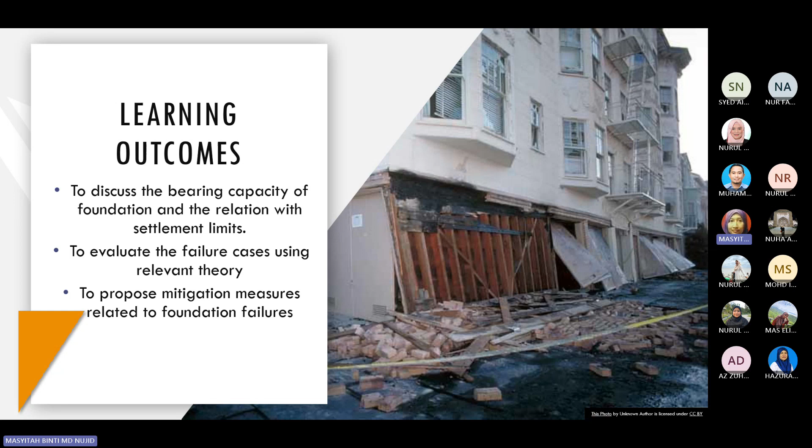For example, just giving you some idea kalau kata foundation ada berapa jenis, kemudian foundation tu apa fungsi dia dari segi design dan konsep, and then the bearing capacity, ultimate bearing capacity, the allowable bearing capacity, and settlement. Finally baru kita pergi kepada case study. So the case study will be in Canada, which happened back in 1940s if I'm not mistaken. Yang tu pun saya akan cover kemudian lah.

Okay, the next one is the concept itself. Sebelum kita tahu macam mana bearing capacity failure tu boleh berlaku, we have to understand the structure itself. So dalam geomechanics ni, bila talking about infrastructure failure, when we design a structure, foundations will be at the lower part of the structure. So foundation ni berfungsi untuk carry the load from superstructure and transmit to the soil beneath the structure. So if the soil is not strong enough, you may have the consequences where the structure will fail.

So we want to ensure that the soil will provide you a good ataupun strong bearing capacity. So by definition, the foundation failure occurs when the applied load on the foundation exceeds the soil capacity to support the load. Maknanya, your punya tanah tu dah tak boleh nak tanggung beban daripada atas, so dia akan fail. The failure ni kita boleh define from the shear strength versus shear stress.

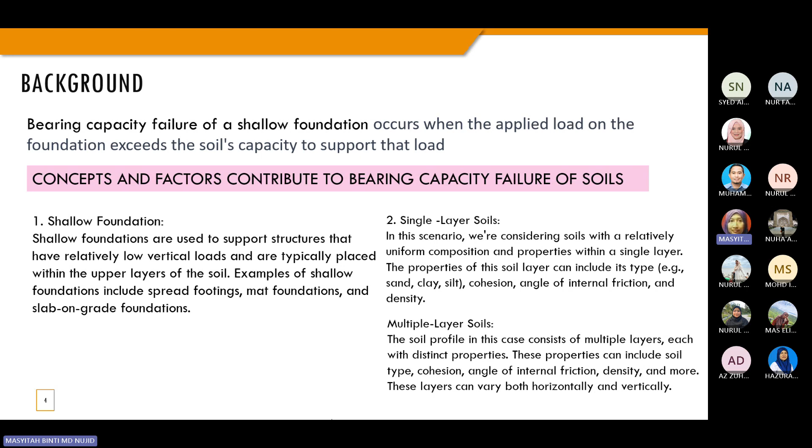The next one is bearing capacity. By definition, it is the ability of the soil to support a load without causing excessive settlement or failure of the foundation. It is usually expressed as pressure or force per unit area, denoted as q. The ultimate bearing capacity is the maximum pressure the soil can withstand without failing. So here we have two q's: one is the ultimate bearing capacity, qu, and the other is the contact pressure, q, which will be explained later.

Factors controlling bearing capacity include soil type, depth of foundation, foundation size and shape, water table, and lastly the overburden pressure. What is overburden pressure? In soil mechanics we mostly consider it as the unit weight of the soil multiplied by depth. For example, with a single layer soil, this is the ground surface, and you look at a stress point 5 meters below the ground surface, so H equals 5 meters.

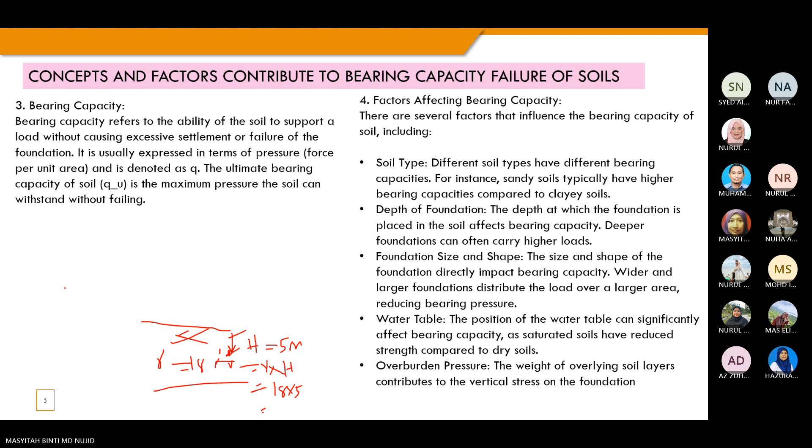So kalau you analyze for single layer, kita boleh ambil simple assumption menggunakan Terzaghi bearing capacity equation. But actually the formula ataupun the equation must be recheck sama ada kita nak analyze bearing capacity untuk clay ataupun untuk sand. So different soil properties will give you different formula ataupun teori calculation untuk dapatkan ultimate bearing capacity. Yang ni yang biasa dia guna untuk conventional calculation.

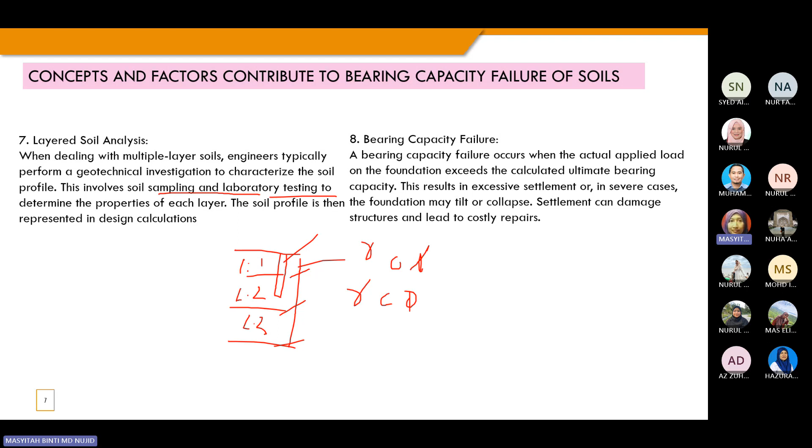So it says that kalau your foundations are laid on the layered soil, so it's better to have data ataupun lab results lah untuk carry out the calculations. So how to carry out the calculations or what are parameters relevant to the calculation? For example here is the gamma, C dan juga phi. So itu yang lebih penting lah. So soil properties daripada lab boleh bagi awak data ataupun input to calculate the bearing capacity. Okay, the next one is on

Okay, ini lebih kepada briefly idea how to differentiate the purpose or how to choose foundations. So as I said again, in order to choose the right foundation type, firstly kita akan tengoklah dia punya function dia, kemudian loading you berapa, and then the hard layer stratum you pada berapa kedalaman. Kemudian kalau you ada borelog report from the SI, so kita dah through the reading tu kita nampak okay hard stratum a bit low kan ataupun dia quite far, so kita dah tak boleh pakai shallow foundation, kita kena pakai deep foundations.

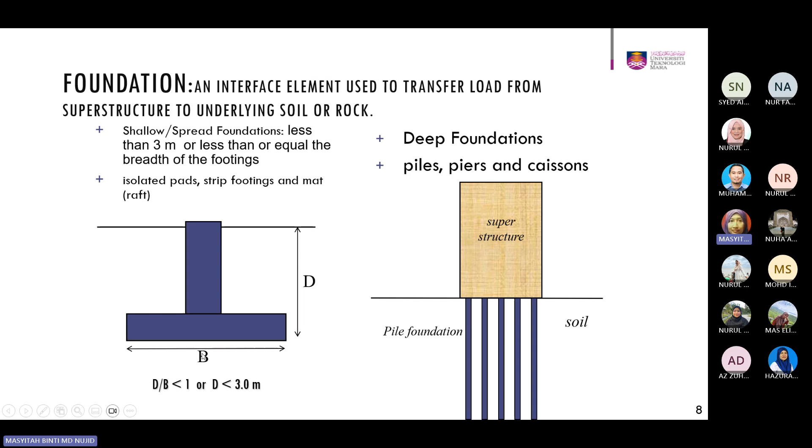So the simple condition is, if the depth over B ratio is less than 1, or depth less than 3, then we use shallow foundation. But if it doesn't meet these two conditions, automatically we can use deep foundation. But now we want to focus here on the shallow foundations part.

These are the factors need to be considered while you design shallow foundation: adequate depth, limiting settlement, and also the factor of safety. Adequate depth means the sufficient depth to prevent any adverse effect due to changes in surface condition, climatic changes, temperature changes, or any kind of horizontal loads or overturning moments. Next is the limiting settlement, for example total settlement, differential settlement, and the angular distortion need to be tolerated in the design. It also depends on the functional performance of the building and the requirement of the users, as well as economic factors.

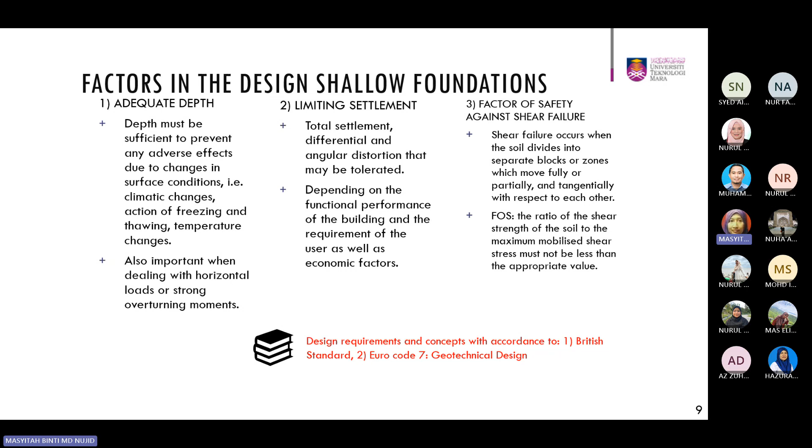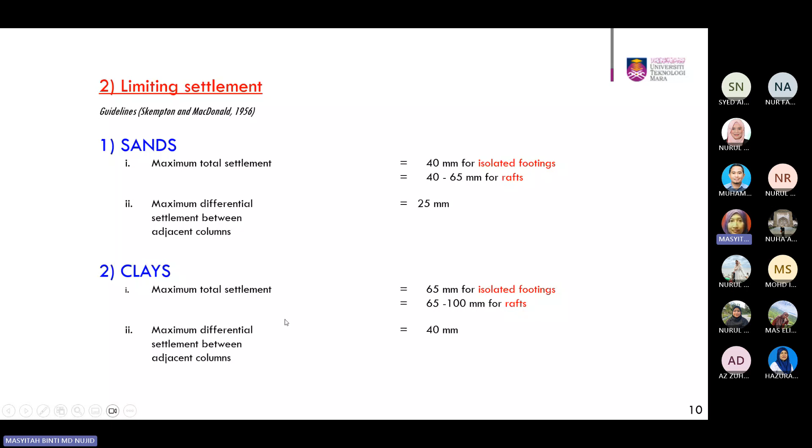Next is on the modes of shear failure - general shear failure, local shear failure, and also punching shear failure. If I'm not mistaken, during undergraduate study for structure, usually we design for punching shear failure. But in some cases, it might only be general shear failure, not going as far as punching shear failure. So that is the worst failure that can occur on foundations.

Okay, for general shear failure, you can see the deformations when you apply the loads - the slip surface develops outward towards one or both sides and eventually to the ground surface. The failure is sudden, with severe tilting leading to final collapse. It is mostly associated with dense sand or over-consolidated soils of low compressibility.

For the local shear failure, the shear plane starts from one side and ends within the soil. So adjacent bulging may occur but with little tilting. And the settlement which occurs will usually be the principal design criteria. This type of failure normally occurs in loose cohesionless soil.

And this is the punching shear failure, mostly occurring in very loose cohesionless soil. So what is loose cohesionless and very loose cohesionless - it refers to the size of the sand itself or the sand density.

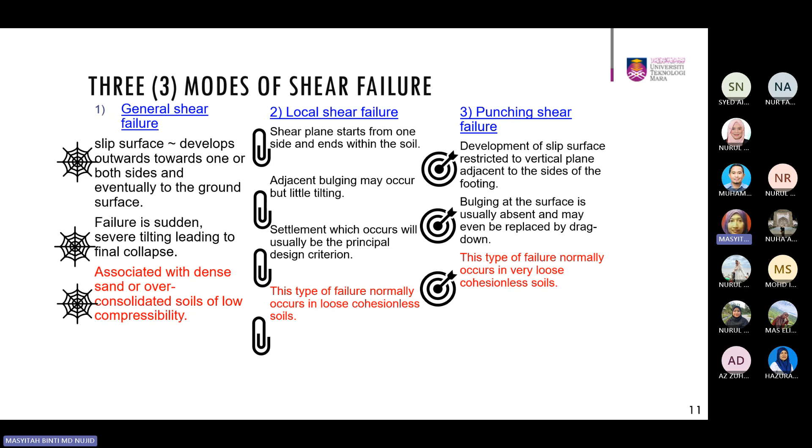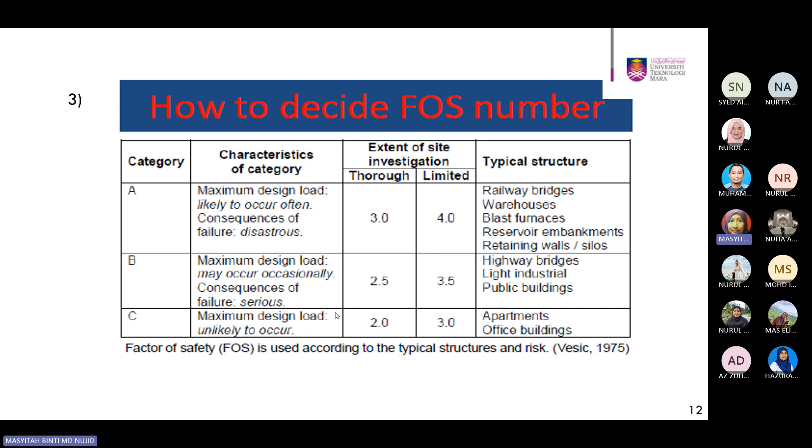Okay, these are some recommendations if we want to design, what value of FOS is allowed. If you have some kind of structure or characteristic like this, or the applications, you can have 3 for example, or 4. I'm not sure, but mostly if we do analysis, we just take it as 3.

The essential points from this brief, general overview about the foundations - mostly we can say the dense soil fails along well-defined slip planes resulting in a general shear failure.

Loose soils do not fail suddenly and the slip planes are not well-defined, resulting in local shear failure. Very loose soil can fail by punching shear failure, and more settlement is expected in loose soils than in dense soils, because dense soil is more compact, so the expected settlement is less.

If soil can be categorized into groups according to size of material, settlement is similar too. Usually for coarse grain soil, the settlement we measure we call immediate settlement. If you have fine grain soil, settlement can occur as primary or secondary settlement.

So the expected failure surface for general shear failure consists of a rigid wedge of soil trapped beneath the footing, bordering radial shear zones under Rankine active and passive zones. Rankine is the theory used to develop the shear failure plane.

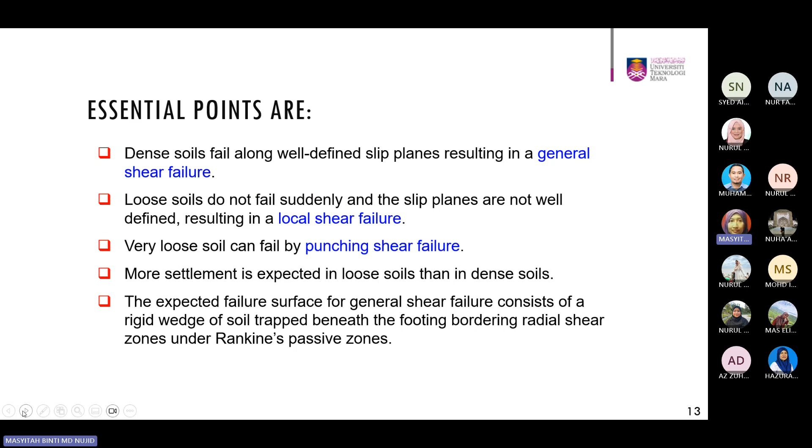Okay, these are some definitions for foundation, for example ultimate bearing capacity, which I mentioned earlier. Some calculations need the net bearing pressure. So it depends - net ultimate bearing capacity is the ultimate bearing capacity minus the overburden pressure.

Factor of safety, don't forget that when you deal with foundations. And we also have the presumed bearing value, which is for preliminary design purposes.

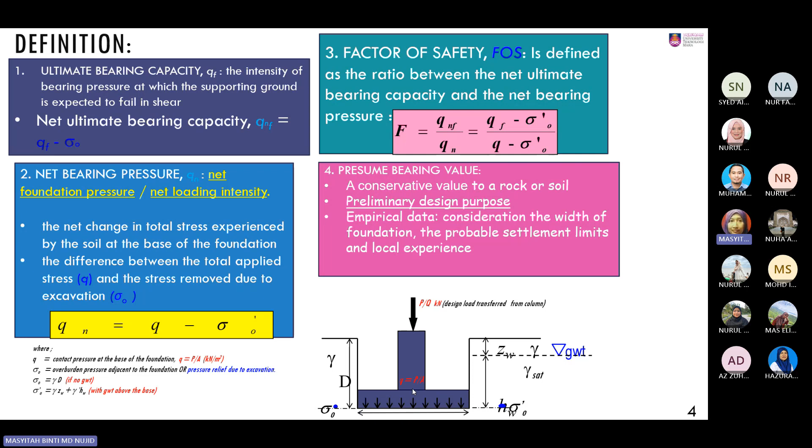Okay, this is an example of how you get the overburden pressure, and how this overburden pressure is affected by the water table effect, part of the unit weight itself, and D is the penetration or excavation depth to place the footing on the soil.

Okay, these are the assumptions made by Terzaghi, as I mentioned earlier about Terzaghi. Actually Terzaghi is a very conventional theory or formula in foundations. Whenever you open a geotechnical engineering textbook, Terzaghi is the first thing - he is known as the father of soil mechanics, so they are very famous.

Besides Terzaghi, we have Meyerhof, we also have Hansen. Why do people like to use Terzaghi's theory rather than others? Because the assumptions made by him are very easy.

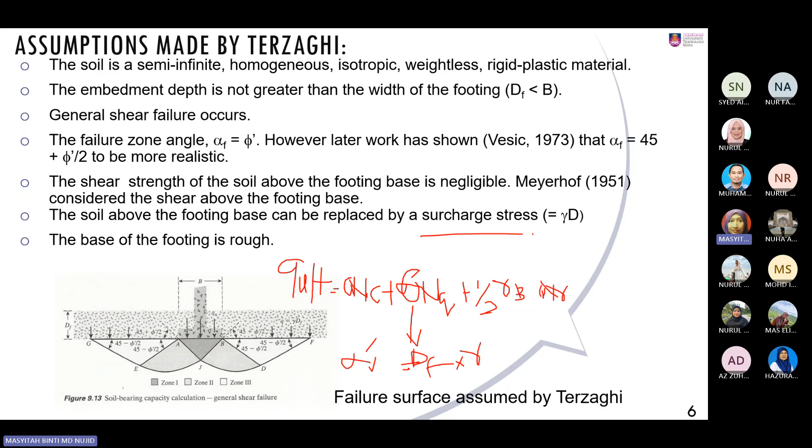And the next assumption is that the base of footing is rough. If you have a textbook, some textbooks also consider the case where the foundation is smooth, so the formula changes and is different.

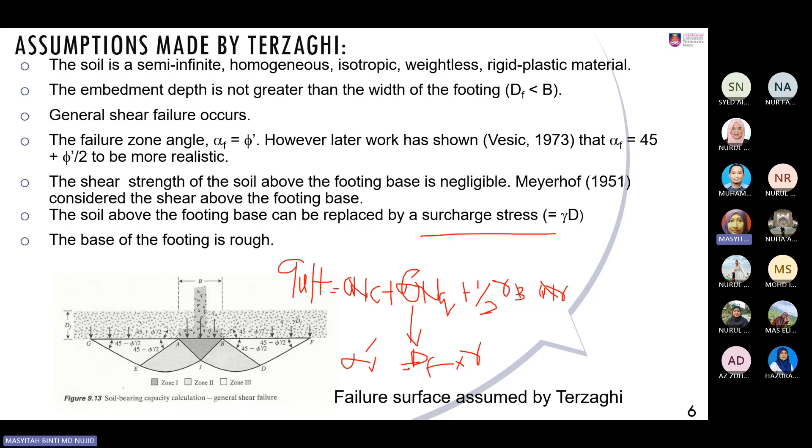Okay, we want to touch a little on the definitions of settlement. Why do I touch on settlement? Because earlier when we looked at the calculation for factor of safety, you have two types - either you calculate the ultimate state based on shear strength, or you calculate the serviceability limit state based on settlement. If you calculate for shear strength, the allowable bearing capacity can be taken with simple calculations without considering the settlement effect. But if you want to consider the settlement effect, the formula for primary settlement is different, and immediate settlement also has a different formula. So what is settlement?

Settlement is the vertical downward displacement at the base of foundation or other structure due to ground movement. What is total settlement? Total settlement is the summation of immediate settlement plus primary consolidation settlement plus secondary settlement. Immediate settlement is usually for coarse grain soil, primary consolidation is usually for soft soil or clay, and secondary settlement involves organic material.

What are the causes of settlement? The cause of settlement is the reduction of volume, the air void ratio in the soil. So settlement is resulted from consolidation. If you remember when we studied soil mechanics, you would hear about compaction and consolidation. Compaction and consolidation are different things.

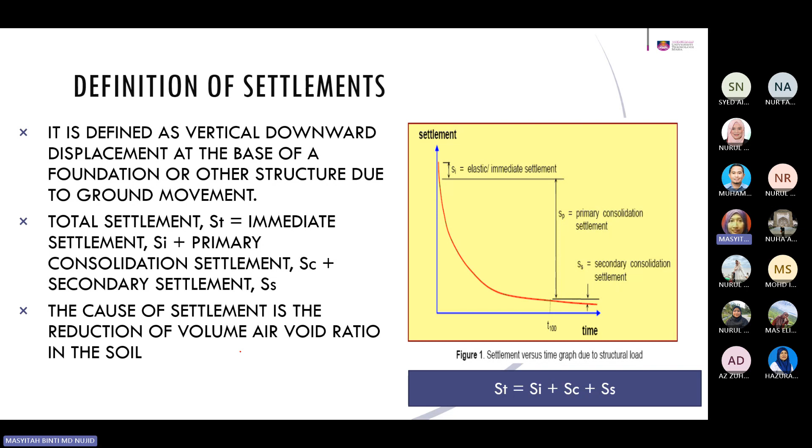So when we plot the graph, this is the graph that you may get from the oedometer test. The graph depends on whether you plot it using the Taylor method or the Casagrande method. Initially is the immediate settlement. Then the middle section, from 0 to 100%, is the primary consolidation settlement. After that is the secondary consolidation settlement. Usually, secondary consolidation settlement takes time to really stabilize or reach its final stage.

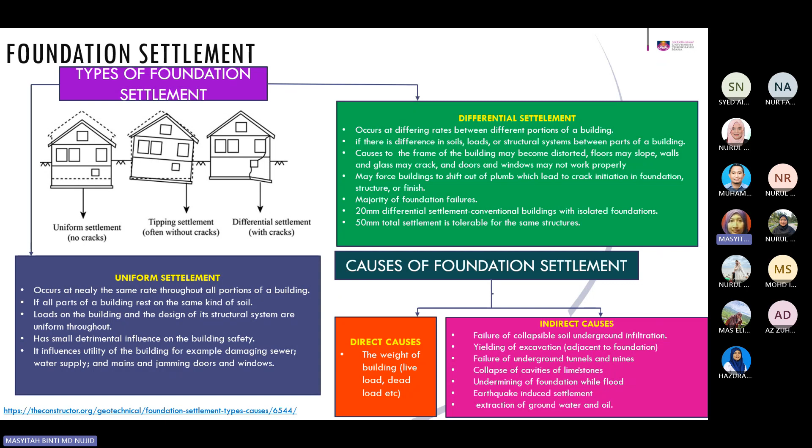Okay, these are the types of foundation settlement. Then the causes - if you have uniform settlement, what is an example? If you have differential settlement, what are the significant signs you can see obviously, and what are the factors? For example, due to direct causes, it may be due to the weight of the building, live load or dead load. For indirect causes, for example, earthquake, failure of collapsible soil, underground infiltrations, and then failure of underground tunnels and mines. So these are the indirect causes of settlement.

Okay, these are some explanations for immediate settlement, primary settlement, and secondary settlement. I hope that after this explanation, you can already answer the learning activity for week 6, if I'm not mistaken.

So kalau kita tengok immediate settlement, sometimes it also can call as a short-term settlement. It can place in coarse grain soils at high permeability and in unsaturated fine grain soil of low permeability. Occurs over a short period of time, which about 7 days, for example. So it ends during construction time.

For primary settlement, it also called as a primary consolidation. It takes around 1 to 5 years, for example. And then the primary settlement frequently occurs in saturated inorganic fine grain soil and expulsions of water from pores of saturated fine grain soils in the course of primary settlement.

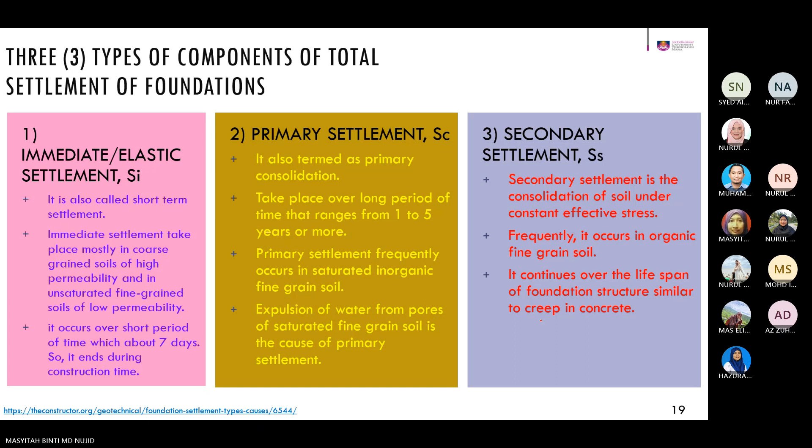For secondary settlement, is the consolidation of soil under constant effective stress, frequently occurs in organic fine grain soil and continues over the lifespan of foundation structure similar to creep in concrete. Okay, the next one is on, okay, these are the theory involved.

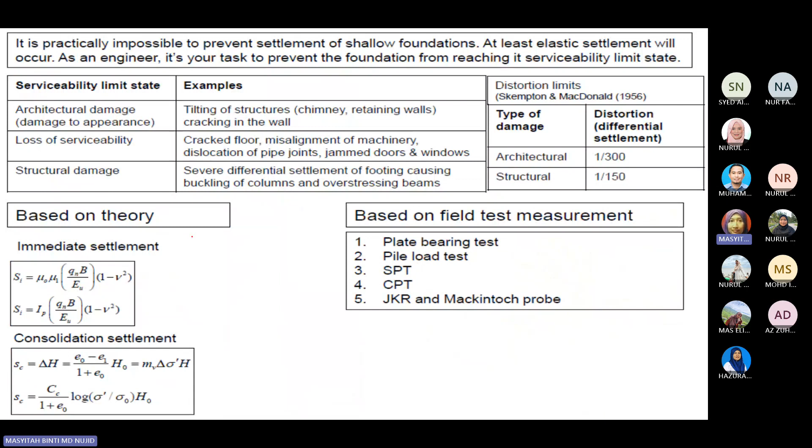Okay, selain daripada tu kita ada SPT, CPT. CPT ni is a cone penetration test. And then the other one is a JKR and Mackintosh Probe. Okay, yang ni some theoretical lah untuk calculate the settlement. And this is example plate bearing test.

Plate bearing test ni something that as Mr. Izwan mentioned just now for shallow foundations, and then we want to see dia punya bearing capacity underneath the structure, and kemudian you kena tengok lah dia punya contact pressure, and the final thing yang kita nak tahu, yang selalu you measure adalah bearing capacity versus dengan settlement lah.

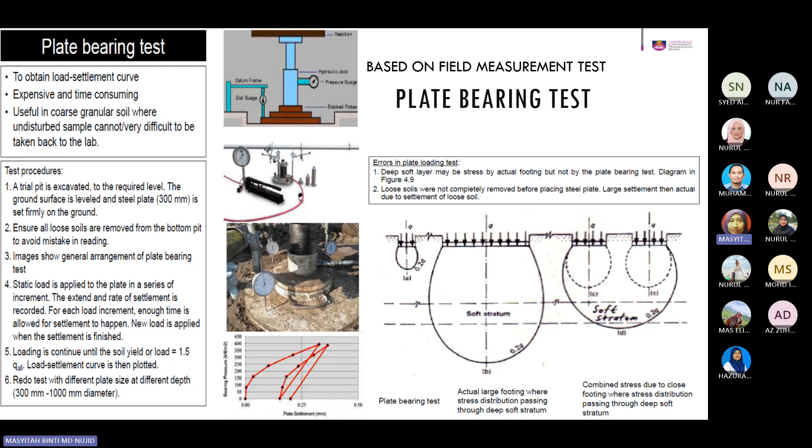For example kat sini vertical axis tu is the plate bearing, and then horizontal axis is the settlement lah. Settlement kalau selalunya design kita set as a 25 mm lah. You tengok lah settlement tu reach or more ataupun less. So yang ni pun bukanlah very common, saya rasa you can have from the online and any sources regarding the plate bearing test.

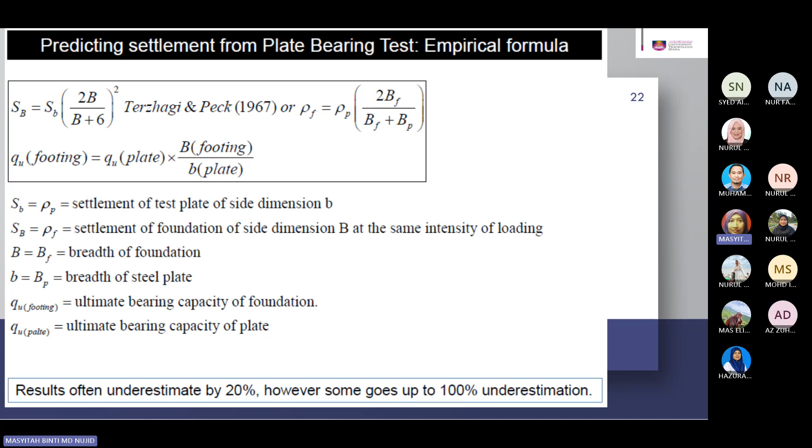Okay, the other last part here untuk empirical plate bearing test sebab ada setengah settlement tu kita tak calculate from the lab, so we want to calculate from the data site. So ini antara contoh correlation or formula yang boleh membantu awak dapatkan answer for plate bearing test settlement calculation. Same goes kalau you ada different soil type. Kalau sand, ini contohnya formula dia lah.

Okay, we want to go in depth for this topic chapter 3 lah. Sebelum kita pergi ke case study tu, the first one is to understand the process of forensic investigations. The first is begin with the preliminary assessment. Preliminary assessment ni, I think that we get the informations part of the desk study punya work lah. Kita collect informations berkaitan dengan our sites, kemudian failure tu berlaku kat mana, apa puncanya. Ini semua yang very commonly we started.

And then we do the geotechnical investigation. Do we need the soil sampling? And then kita perlu tak buat testing because we want to investigate what are the causes to the failure. Adakah contohnya kalau slope failure, ada tak they have pre-existing slip failure before this?

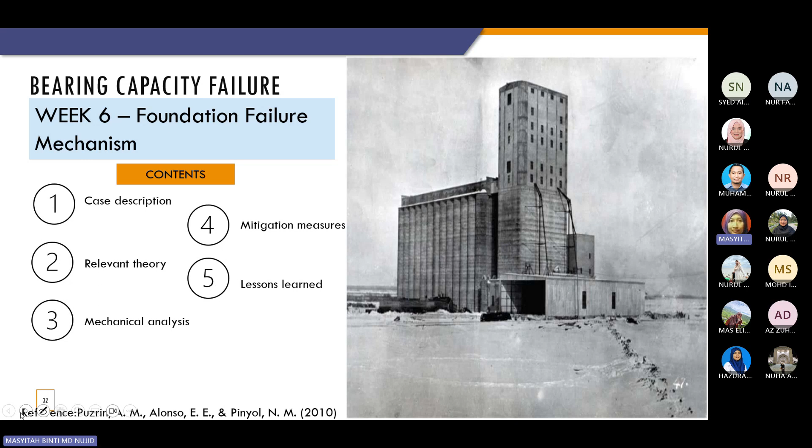Alright, okay, next is on the first learning outcomes, similar as I explained earlier. So just back to definitions again, bearing capacity failure is defined as a foundation failure that occurs when the shear stresses in the soil exceed the shear strength of the soil. So what does it mean?

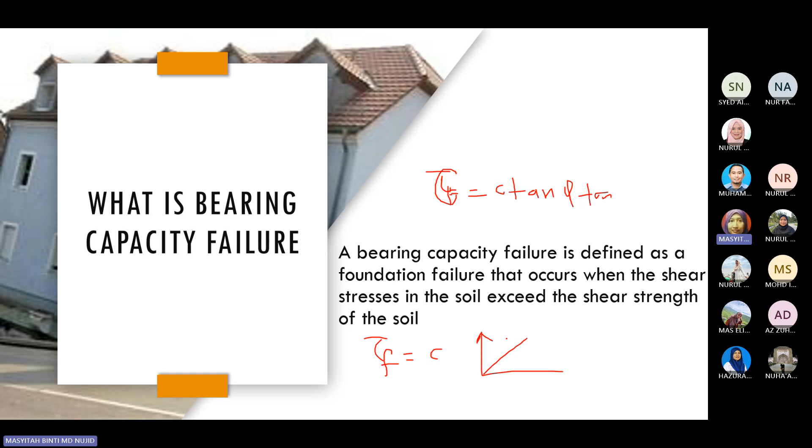If we assume this is our shear stress and this is the shear strength. By definition also, it relates to what we call the Mohr-Coulomb failure criterion. So if this one is our failure line, the failure or the shear stress is defined here.

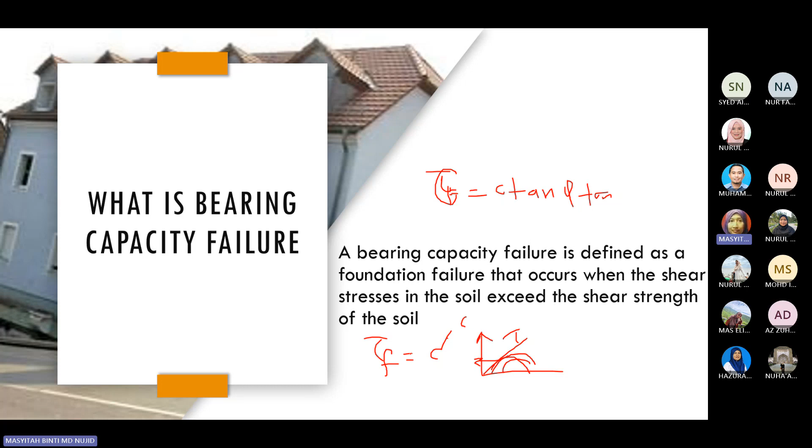If your shear stress doesn't exceed the shear strength, and when we plot the Mohr circle for example, it doesn't reach or touch the failure line here. So you can say that the foundation or the soil is safe. But if the failure has already touched and you can define the failure line, the shear stress has already reached the shear strength. So this results in the bearing capacity failure. So we go to the case descriptions.

Again for this chapter 3, kita ambil one case for shallow foundations and another one case untuk pile foundations. Untuk shallow foundations, we are referring to the Transcona grain elevator. So this is a case reported back in 1913 in Canada. It is purposely built, ataupun it has a warehouse designed to store grain from the city of Winnipeg and the wider area. So the purpose of the elevator was to provide relief of the Winnipeg yards during the months of peak grain shipments.

So the building has an engine room, kemudian grain storage area containing 5 rows of 13 containers with a total volume of 30,000 meter cube. So maknanya bangunan ni besar lah, sebab dia gudang kan, gudang yang nak letak beberapa functions kat sini. Kemudian the construction is based on a reinforced concrete slab measuring 23.5 meter times 59.5, with an upper and lower reinforced concrete slab 60 centimeter thick between which there is a space for emptying. So such a foundation structure with 2 slabs and transverse and longitudinal stiffness walls is a very rigid foundation.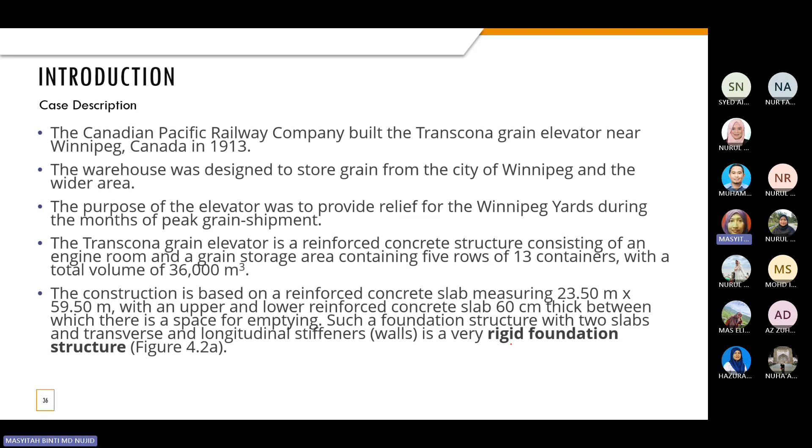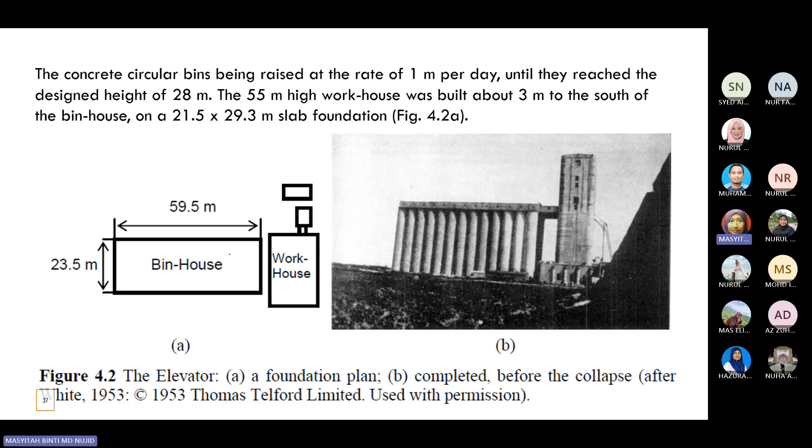So looking at these explanations, this is the building as shown in figure A, and this is the picture showing the conditions of the warehouse. So nampak dia punya storage ada few rows of vertical structure. Kemudian dia punya foundation is around 59.5 times 23.5. So kalau tengok sini is a shallow foundation lah, sebab dia menggunakan large foundations to carry the functions of the building. So this is the condition before collapse. Now we want to investigate the causes of the failure and how the assessment was carried out.

So the excavation, just the explanation macam mana proses pembinaan, kira kata dia buat balik penyiasatan lah, dia buka balik buku penyiasatan, dia siasat balik history of the construction, and then dia relate balik finding from the site failure. And they found out during construction in 1911, dia buat excavation untuk elevator foundation ni at around 1.5 meter, dengan foundation soil adalah soft soil. So the excavation penetrated into relatively stiff blue clay, which is typical for that area and locally known as the blue gumbo. So ini yang dia nak explain soil profile dekat kawasan gudang tersebut.

So maksudnya failure tu berlaku 1913. So penceritaan dia patah balik 2 tahun sebelum failure tu berlaku, pada masa construction. So dia dapati kawasan tu adalah tanah jenis lembut dan stiff blue clay, and there is no boring profile. It was reported by White 1953, and the excavation reached its design depth of 3.7 meter. And field bearing capacity tests were carried out by loading a plate laid upon a prepared smooth clay surface. Maknanya dia dah buat juga plate bearing test. Tapi mungkin some profile not direct to the answers lah.

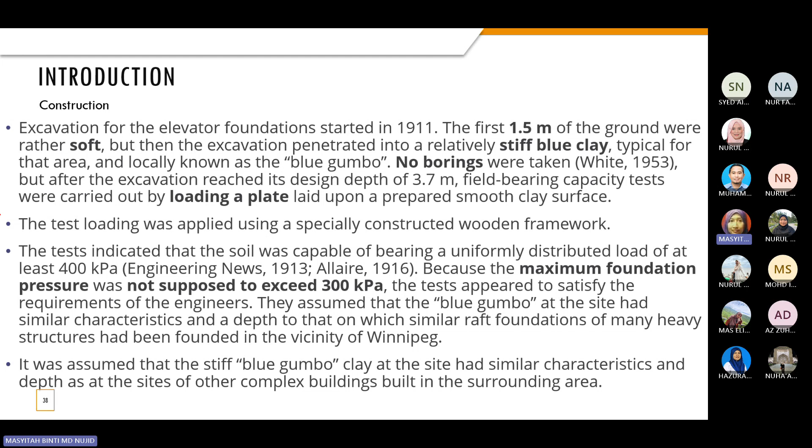Okay, the blue gumbo ni kalau ikutkan soft clay ni, it's very sensitive. I mean that part of the high water content and it is very low permeability. So bila kita deal with the soil like this, sebelum kita nak buat construction selalunya orang akan buat treatment lah, ataupun kita buat consolidation. The purpose we are doing consolidation is because we want to expel water through the site area, and from the consolidation sebenarnya dia increase the vertical stress. So dia bagi satu tambahan lah untuk profile tanah tersebut. Tapi this case bila dia tak buat yang sepatutnya, so that's the thing yang berlaku lah.

Okay, what are the failures that occur? The failures occur from this one: large settlements of the storage building were noticed after the tanks were filled with the grain up to 87.5. Initially, dia tak nampak langsung settlement tu berlaku.

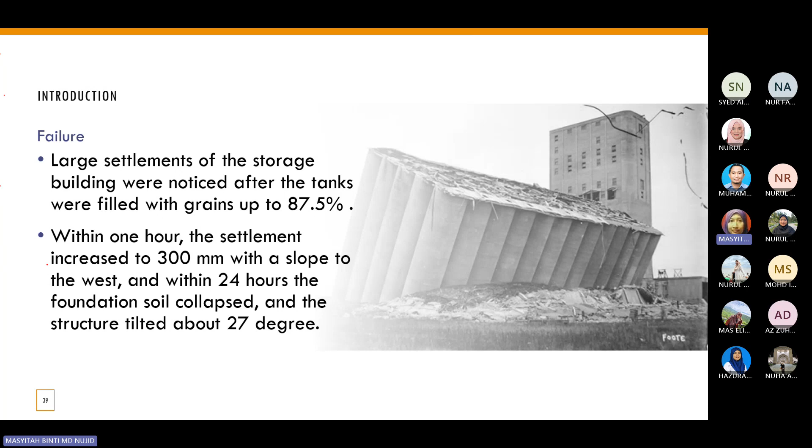So within 1 hour, the settlement increased to 300 mm with a slope to the west, and within 24 hours, the foundation soil collapsed and the structure tilted about 27 degrees. So this is a very historic failure that occurred in Canada. But it's become something good lah sebab we learn from the mistake, and again from here, the geotechnical area becomes something interesting to figure out.

Okay, what are the problems actually? Several deeper exploration boreholes were drilled after the accident.

Doktor muted kot? Doktor? Doktor Masyitah? I'm back. Yes, I'm back. Oh, okay. Sorry, just now.

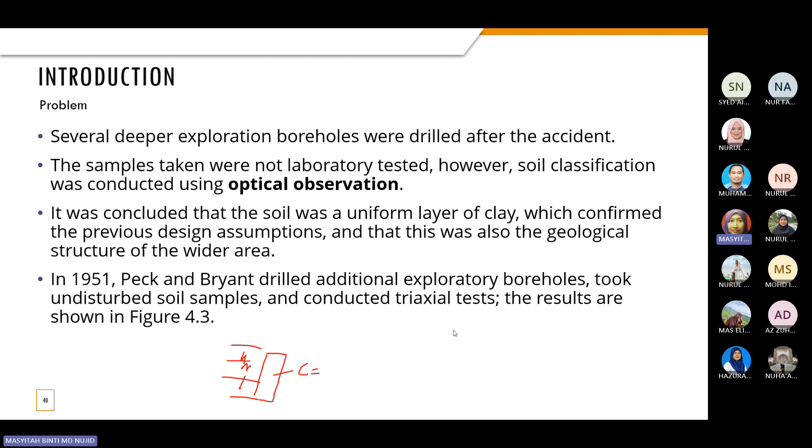So in 1951, the failure already was few years ahead. Then they came to engineers untuk buat detailed explanation and detailed investigations on that failure type. So they conducted borehole testing and then collected the undisturbed soil samples and conducted triaxial tests, and the results shown this way. So it is very unexpected. Maknanya mungkinlah pada tahun bila dia buat optical observation, dia punya limitation adalah equipment ataupun dia tak ada expert yang ramai untuk further investigate. But then in 1950 something, came these 2 engineers, dia dah ada better knowledge and dah ada hands-on skill, then dia buat site exploration, they found out these are the soil profile.

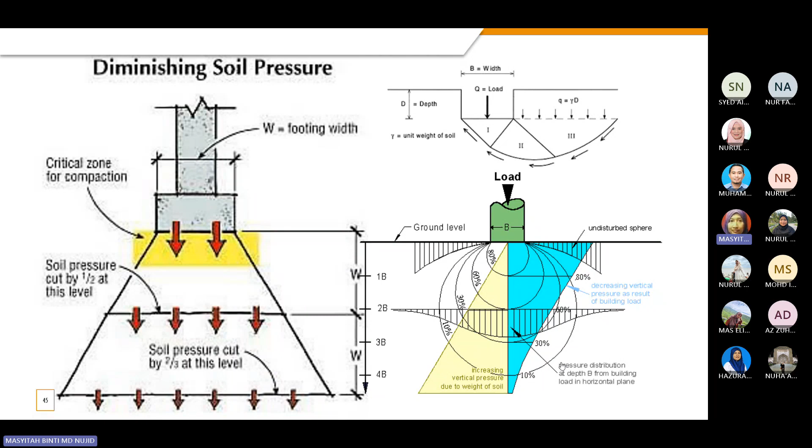Okay, the failure mechanism. Last but not least, before we end our class, on the part of the failure mechanism, because we have studied the construction and some explanations on the technical aspect, and now we want to look at its failure mechanism.

An excessive settlement takes place due to consolidation and secondary compression, caused by a decrease of the soil volume below the foundations. Therefore, it takes place rather slowly, and the ground surface around the structure subsides together with the foundations as shown in figure 4.4a. So this is the problem. We have the foundations and the settlement that resulted from the loads applied, shown as S.

B is where, when you add more loading, initially 10 kilonewton for example, then you increase the loads until one time the soil cannot support any more loading applied, so you can see the failure starting to occur. So this part of the bulging is created.

In a bearing capacity failure, a failure mechanism is formed below the foundations, so the settlement takes place much faster and without a decrease of the soil volume. Therefore, the displaced soil has to find itself an exit, causing a ground heave in the vicinity of the structure.

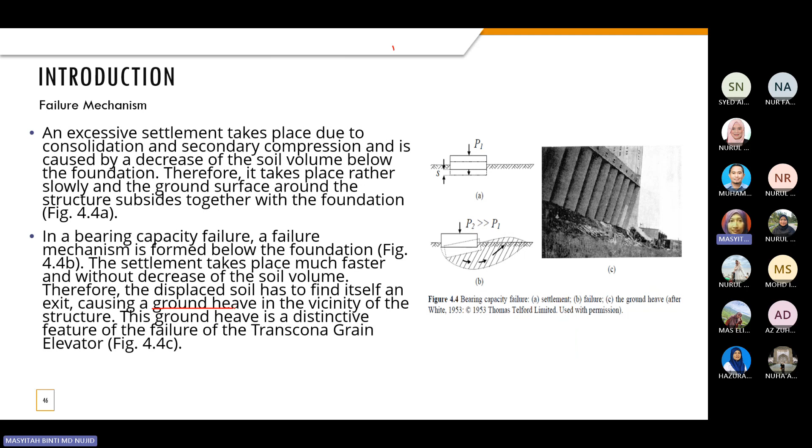Because local shear failure occurs for clay type soil, its indicator is tilting or bulging in the vicinity of the structure. Here it's also highlighted that it caused ground heave in the vicinity of the structure. That's the sign or failure mechanism to the building.

So the particular problem of the Transcona grain elevator was that the failure mechanism of the plate loading test were apparently confined to the upper stiffer clay layer due to the relatively small size of the plate. The elevator foundations, however, developed a much deeper failure mechanism which entered the weaker clay layer, significantly reducing the bearing capacity.

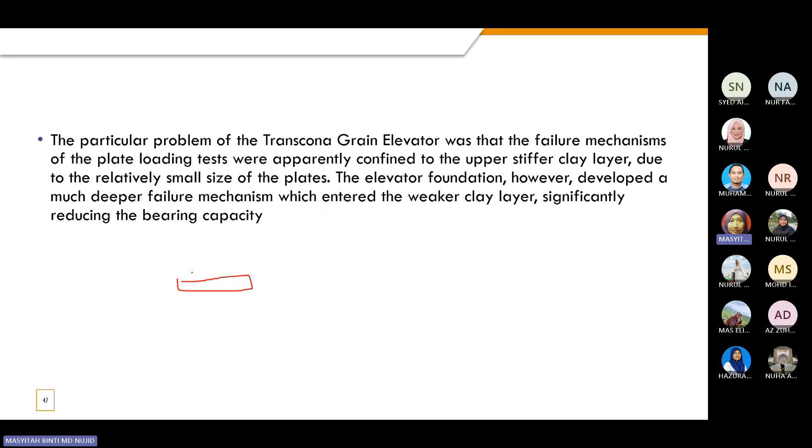It says that the plate bearing test conducted during construction, at the early stages of construction, did not go deep enough to give sufficient bearing capacity. It was just limited to a few meters, so it was assumed that it's already enough.